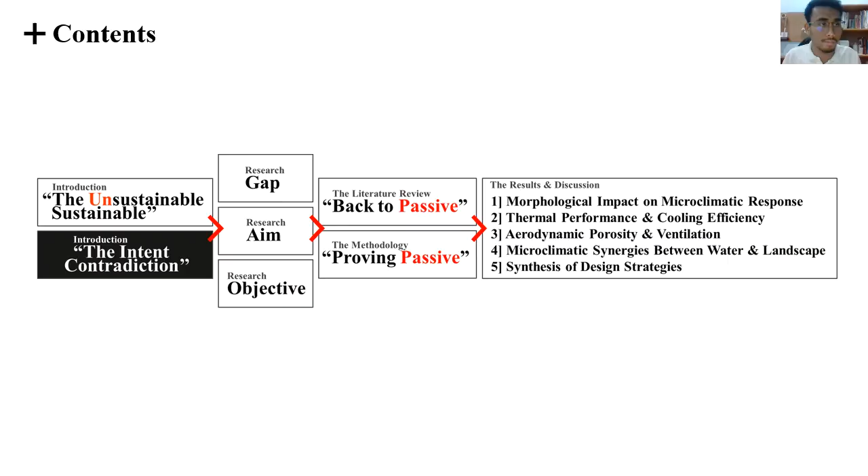The contents of the presentation follow the standard research trajectory, moving from the introduction to the research gap, aim and objective, to the literature review, the methodology, and a deep dive into the result areas and discussion, and finally to the conclusion. We start our introduction with a paradox named the unsustainable sustainable.

When we think about it, globally and also in the ASEAN region, tourism development has increasingly shifted toward more sustainable tourism models, which include community-based tourism, ecotourism, and also rural agrotourism, which all emphasize the environmental experience and local context. In tropical regions, specifically in this research area, many village stay facilities located along riverbanks are essentially intended to benefit from natural landscapes and microclimatic potential.

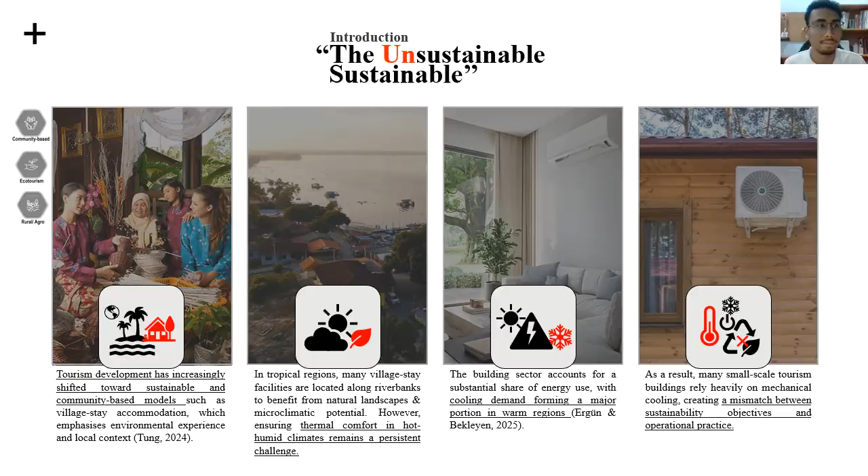However, being in these tropical regions, thermal comfort is always a persistent challenge. Despite the eco-friendly branding introduced earlier, the building sector accounts for a substantial share of energy use, with cooling demand forming a major portion in warm regions. Therefore, many small-scale tourism buildings rely heavily on mechanical cooling such as air conditioning. From this, we can essentially see a mismatch between the sustainability objectives and the operational practice reality. In conjunction with the previous slides, we can clearly see the intent contradiction.

How about we look back at our vernacular tropical architecture, where passive environmental control can be achieved through climate responsive design. Traditional Malay stilt houses, which are the elevated ones, incorporate elevated floors, lightweight materials and permeable building envelopes to enhance ventilation and reduce heat accumulation. Settlements also benefit from proximity to water bodies, which can reduce surrounding air temperature when building form and layout allow effective airflow penetration. This principle suggests that building morphology and elevation play a critical role in passive cooling performance.

Alternately, many contemporary village stay and homestay buildings, including our very own kampung today, adopt enclosed layouts, which are for the air conditioning, and heat retentive materials such as metal roofing without adequate passive design strategies. Poor ventilation and inappropriate envelope configuration have been shown to increase indoor heat gain and occupant discomfort. Today, in homestay buildings, even in riverside locations, cooling benefits are often reduced by improper building density and orientation that obstruct airflow from the water body.

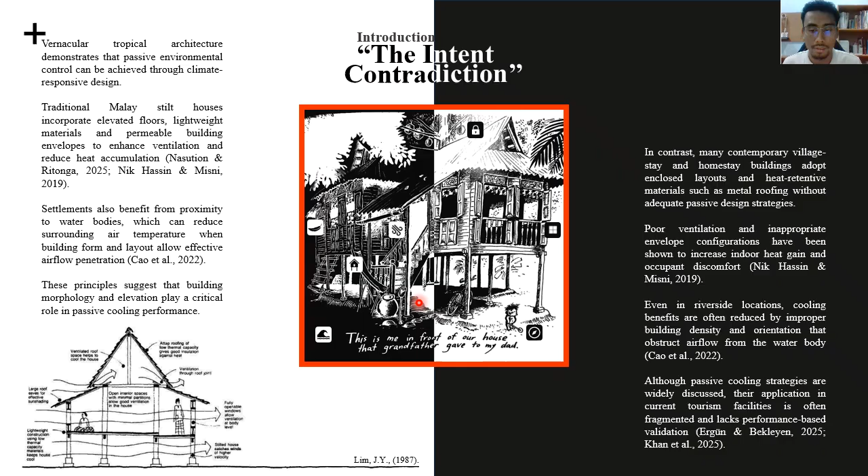Although passive cooling strategies are widely discussed in the previous literature, their application in current tourism facilities specifically is often fragmented and lacks performance-based validation. The research gap is limited availability of field-based quantitative comparisons of passive cooling performance between different riverside building typologies. As mentioned in the previous slide, most previous studies emphasize only general guidelines or simulations. However, measured environmental performance data that compares terrestrial and stilted village stay buildings in actual tropical conditions is still limited.

Therefore comes the research aim: to quantify and compare the passive cooling performance of terrestrial and stilted riverside village stay building typologies under tropical climate conditions through on-site environmental measurement. So how are the on-site environmental measurements done? Through the objective to evaluate cooling efficiency and airflow behavior in order to provide empirical evidence that supports climate responsive design strategies for low energy riverside tourism facilities.

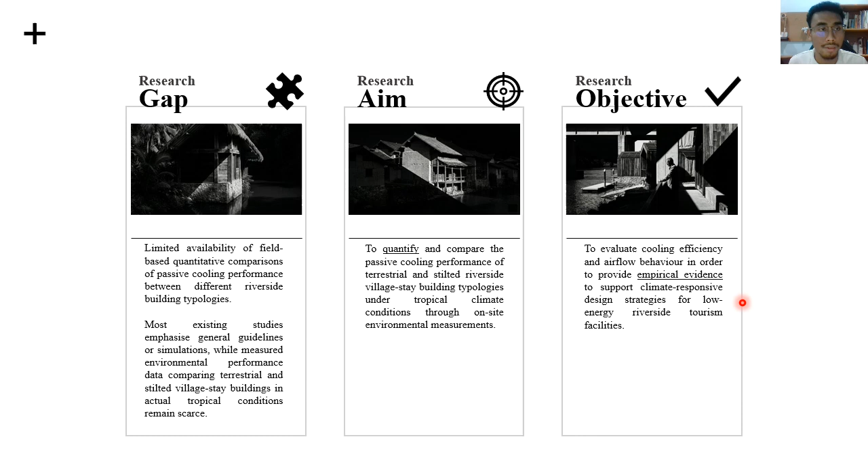Moving into the literature review, responding to the intent contradiction from the earlier slide, this brings us back to passive. First, regarding thermal comfort, as the study aims to quantify empirical evidence, this research used the ASHRAE benchmark to define success. Note that wind speeds between 9 to 15 km per hour are essential for good passive cooling in these environments. For the tropical climate condition in the Malaysian context, we face constant high humidity and temperatures averaging 23 to 32 degrees Celsius.

Here, passive design is not just an option. It requires low thermal mass envelopes that allow heat to escape continuously rather than trapping it. For the passive cooling strategies, our focus is on reducing mechanical reliance by considering orientation and shading in the early design phase. We can significantly reduce the carbon footprint of these tourism facilities.

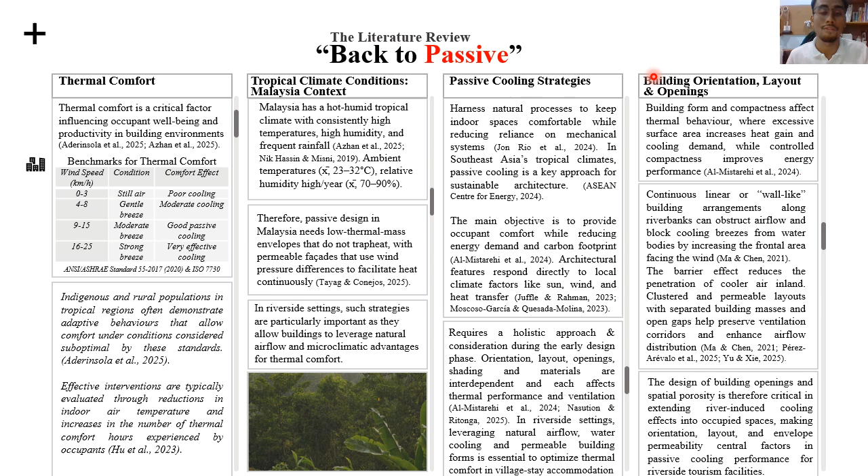For number 4, building orientation, layout, and openings focus on porosity. We have found that wall-like linear buildings actually block river breezes. Instead, we advocate for clustered, permeable layouts that preserve ventilation corridors, ensuring that natural cooling reaches every occupied space of the tourism facilities. Building on the gaps identified in the literature, we move to our methodology.

To validate these theories, we conducted field-based quantitative comparisons between two distinct architectural typologies. Case study A is a linear water-dwelling typology that maximizes exposure but risks wind shadows, and case study B is a clustered, compact riverside typology integrated with vegetation to moderate the microclimate. By comparing these, we can isolate how morphology and elevation directly impact airflow friction, temperature difference, and thermal comfort.

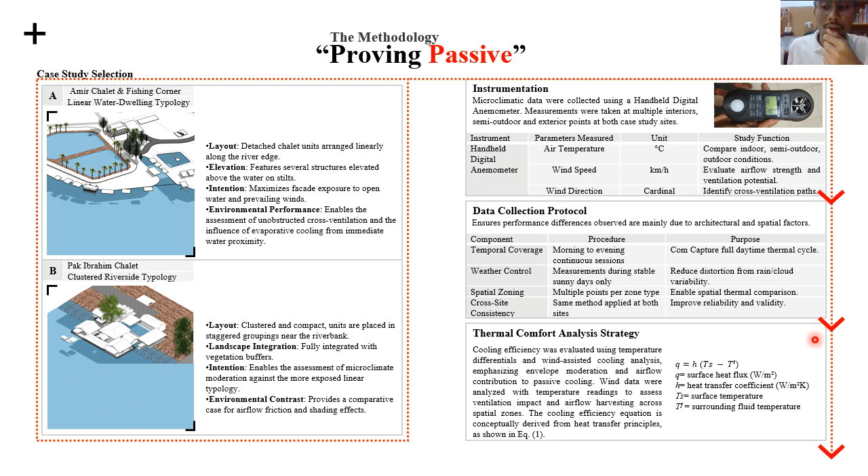For the instrumentation and protocol, we utilized handheld digital anemometers to measure air temperature, wind speed, and direction across various spatial zones. Our protocol ensured reliability by measuring only during stable sunny days to capture the full daytime thermal cycle. This allows us to calculate cooling efficiency using temperature differential, providing empirical proof of passive performance. Moving into our results, we first examine the morphological impact on microclimatic response.

The results: in case study A, the linear arrangement and dense vegetation actually create a wind shadow, dropping average wind speeds to just 3 to 6 km per hour. However, case study B achieves speeds of 9 to 12 km per hour. This confirms that the stilted form is superior.

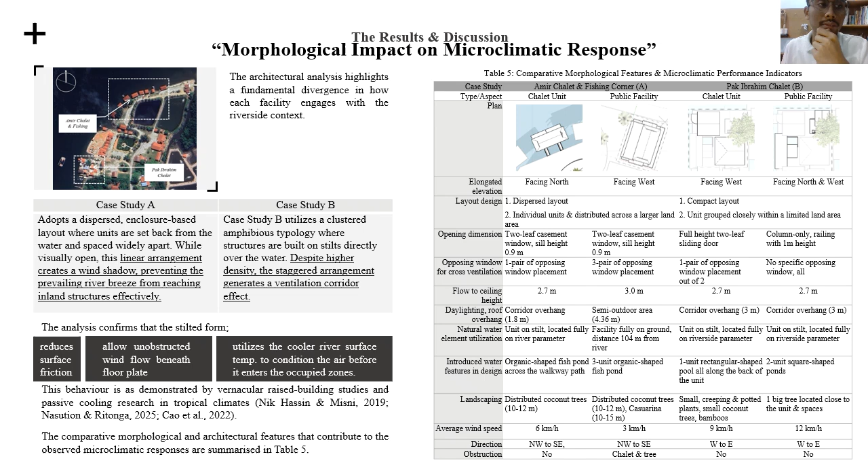So, case study A demonstrated critical thermal failures, particularly in the morning. The public facility recorded a negative cooling efficiency of -11.54% at 8 a.m. This indicates a heat trap condition where the building envelope retained solar heat from the previous day. Despite deep roof overhangs, the lack of high-level ventilation prevented buoyant hot air from escaping, creating pockets of stagnant heat for case study A.

And case study B consistently achieved positive cooling efficiency, peaking at approximately 11%. Indoor temperature remains stable and significantly lower than the outdoor ambient during peak afternoon hours, even during the evening. The success is attributed to the stilted, breathable roof design and low sill heights, ranging from 0 to 0.4 meters, which facilitate continuous stack ventilation and enhance cross airflow.

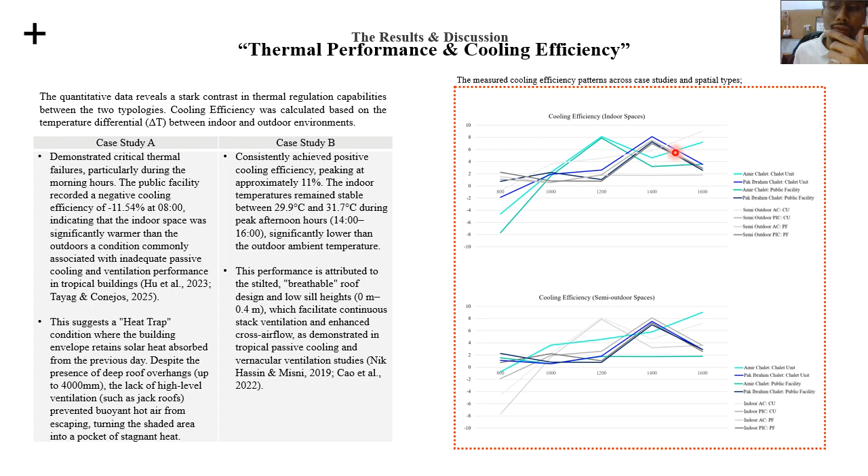Meanwhile, for case study B, the stilted clustered typology recorded wind speeds that effectively match the regional baseline, 13 km per hour. The column-only structure and full-height openings create a low-resistance profile. This allowed the venturi effect to accelerate airflow through the clusters. This challenged the conventional assumption that lower density equates to better ventilation, as suggested in the previous literature.

Instead, the results suggest that the clustered streamlined morphology, as seen in case study B, creates a wind tunnel effect that effectively channels cooling breezes, whereas dispersed but obstructed layouts in case study A dissipate wind energy.

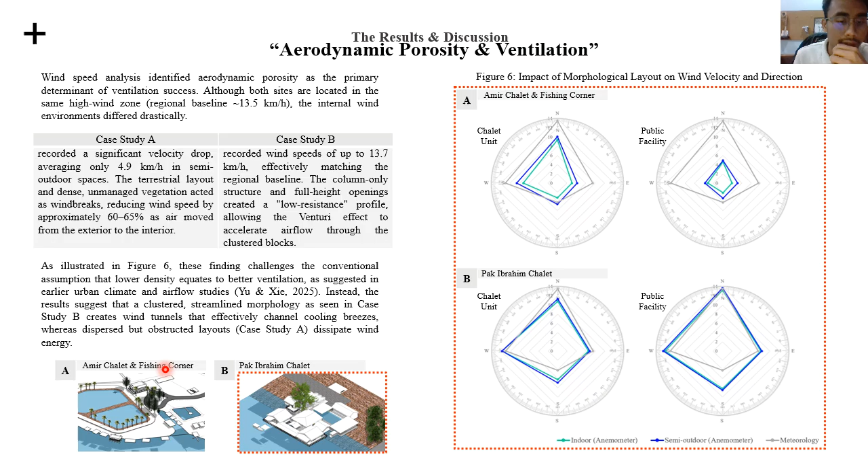Moving to our final findings on environmental synergies, we found that proximity to water is far more critical than its total area. Case study A has massive aquaculture ponds, but because they are disconnected from the building footprint, they provide negligible cooling. In contrast, case study B's stilted positioning over the river creates an active cooling corridor where air is pre-cooled over the water surface before entering the envelope.

We also observe species-dependent vegetation effects. Case study B used a high canopy tree to shade the roof while keeping the windows at ground level open for maximum airflow, while the tree acts as a shading device for the overall scheme.

So, synthesizing these results, we established three design imperatives for riverside tourism. First, terrestrial setbacks are climatically inefficient. Buildings should be elevated on stilts to minimize surface friction. Second, thermal traps are caused primarily by stagnant air rather than solar gain alone. Finally, we must prioritize permeability over insulation, specifically in the riverside area, by using full-height openings and ventilated roof ridges. Together, these strategies allow buildings to revert to a naturally ventilated, amphibious morphology that responds directly to the tropical hydrological context, which is the riverside itself.

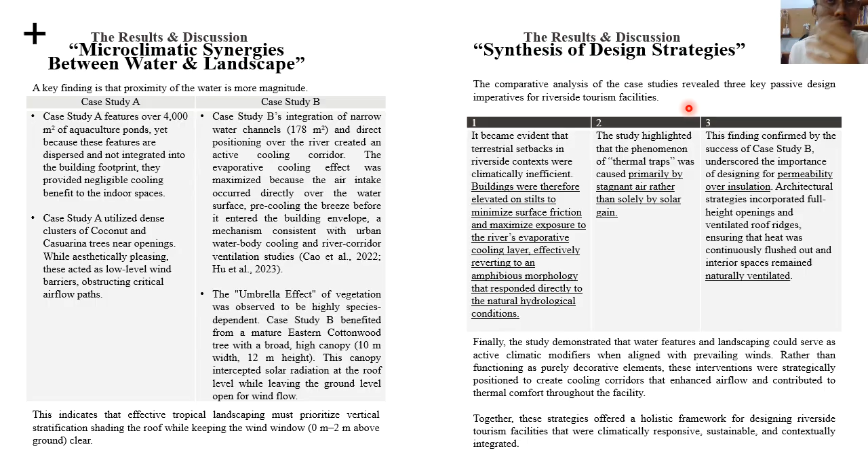In conclusion, our research established a definitive link between architectural typology and thermal success. We have demonstrated that the performance of riverside village stays is fundamentally dictated by typological choice, showing a stark contrast between traditional stilted forms and modern terrestrial layouts. While grounded terrestrial facilities often suffer from a heat trap effect, with negative cooling efficiencies as low as -11.54%, stilted amphibious structures maintain a consistent positive efficiency of approximately 11%.

This disparity is driven by the stilted configuration's ability to harvest natural river breezes at speeds of up to 13.7 km per hour, which match the regional baseline, whereas terrestrial buildings act as aerodynamic barriers. Ultimately, for long-term sustainability in tropical tourism, designers must prioritize morphological breathability over energy-intensive mechanical systems.

By returning to core principles of permeability, altitude, and environmental synergy, we can create authentic low-carbon experiences that are naturally attuned to the tropical climate, which concludes that passive cooling is the actual technology from ancient times that is evergreen, relevant to our context, and in this case, to the tropical climate riverside.